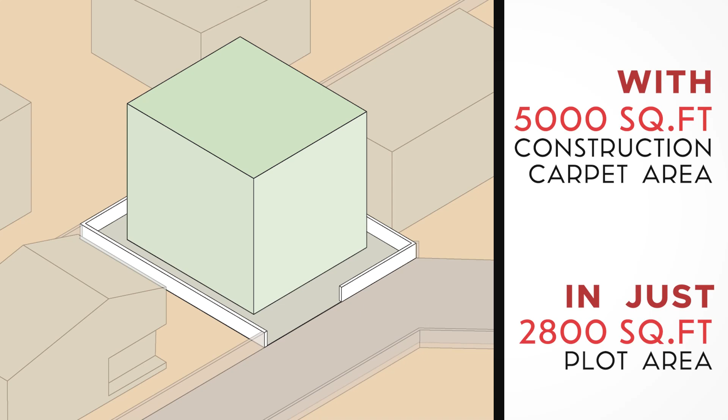The house belongs to a joint family of 3 generations. It is designed to reflect the occupant's personality while not losing sight of the home's overall character and materiality.

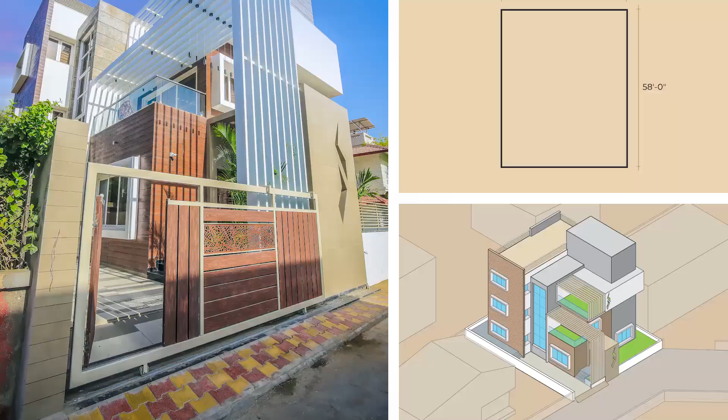The elevation limits and divides the vertical massing by staggering the cuboids at various levels such that the constructed area doesn't overpower the plot area. The cantilever cubes give more space for interior and make it overlook the outside.

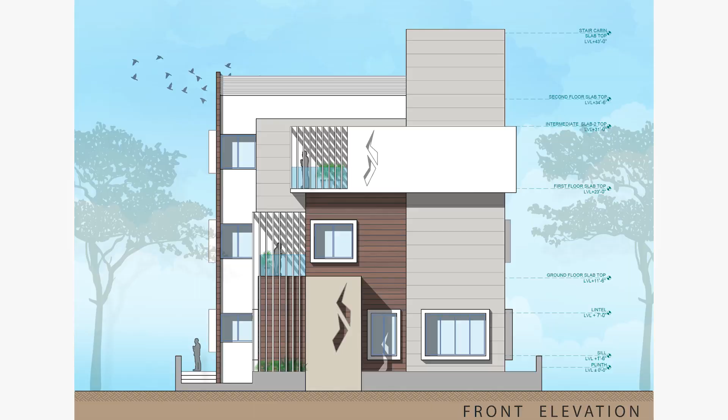The freestanding carved RCC wall in the front facade helps maintain privacy along with the appealing greenscape. The mass of various cuboid volumes staggered at various levels makes it a self-shading structure.

To help shading and privacy, vertical screens are added connecting the floors, and the facade is designed with exposed RCC cladding along with wooden highlights as a response to the earthy context.

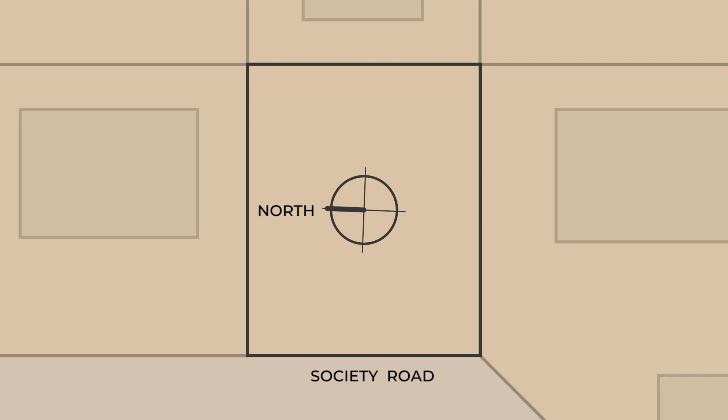The Urban Cuboid House is a small compact house with comfortable and spacious interiors which reflects the cuboid volumes in the exterior.

The elevation limits and divides the vertical massing by staggering the cuboids at various levels such that the constructed area doesn't overpower the plot area.

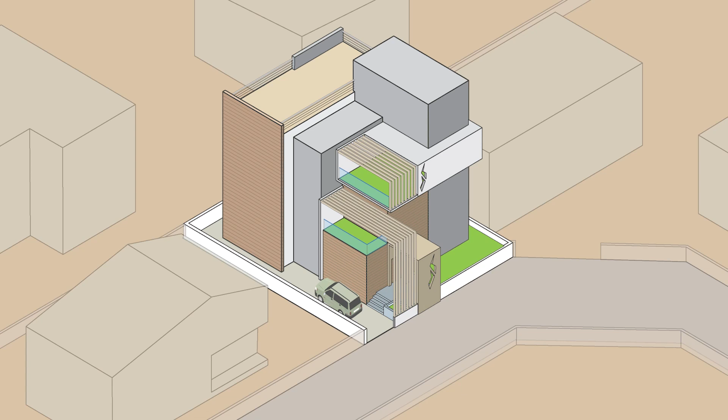The Urban Cuboid House is a mass of various cuboid volumes that are staggered at various levels, making it an interesting self-shading structure.

A spacious vestibule opens to the drawing room, located next to the greenscape. It allows ample natural light with a set of contemporary furniture and lighting elements, having a stone-cladded wall as a background, giving an earthy effect.

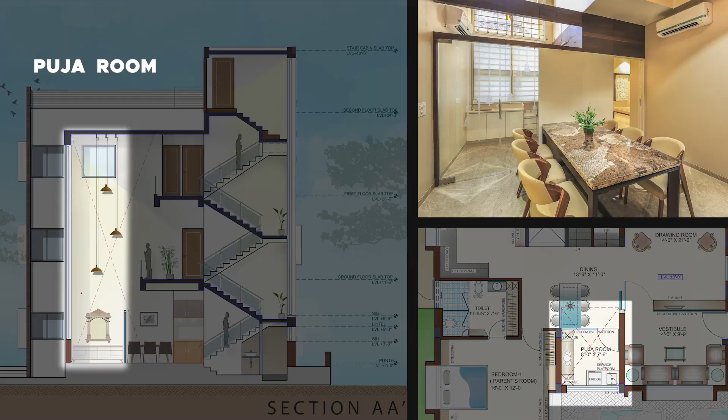The dining and kitchen are placed next to each other along with a triple-height puja room and transitional area. This triple height acts as a light shaft, keeping the house full of light throughout the daytime.

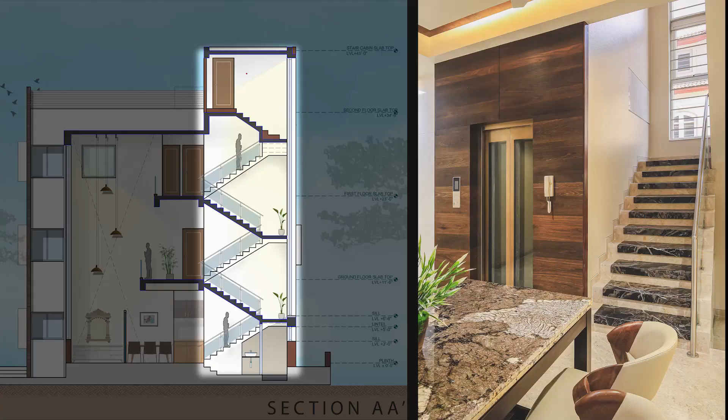The parents' bedroom on the ground floor is designed to have a visual connection to the entrance and the other common activities. The staircase and lift act as vertical transitions to all floors. The first floor passage connects to 3 bedrooms and overlooks the triple height light shaft above the puja room.

Balancing the velvety touch of blue with the subtlety of solid wood and neutral tones makes an interesting color palette for the master bedroom, and a balcony overlooking the entrance gives a refreshing relation with nature.

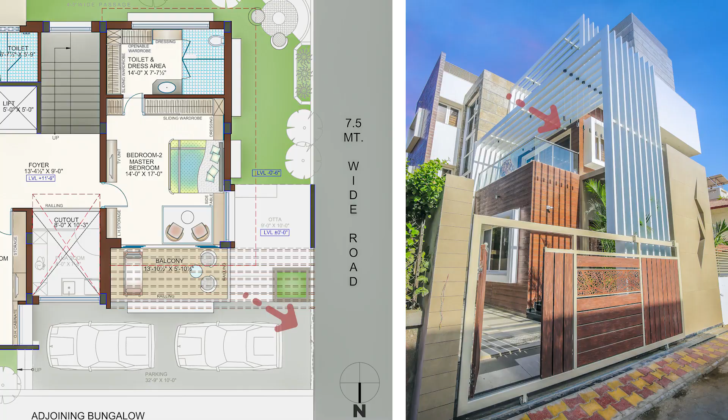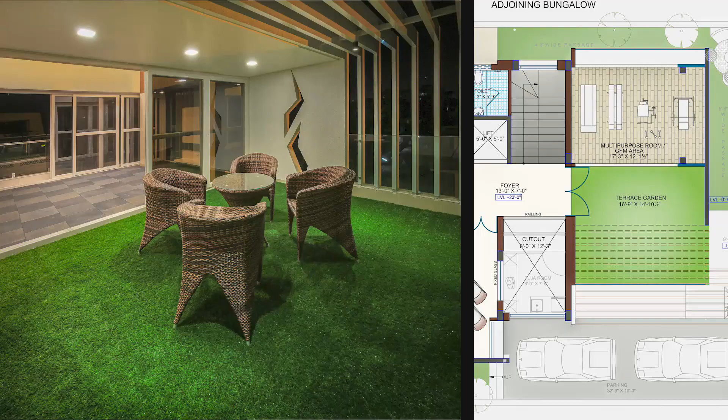The second floor has 1 guest bedroom, a home theatre, jacuzzi, a multi-purpose room and open terrace garden. The multi-purpose room opens to the terrace garden. Beautiful outdoor furniture and mild lighting and plants give a perfect ambience at night.

The Urban Cuboid House is a small compact house with comfortable and spacious interiors which reflects the cuboid volumes in the exterior.